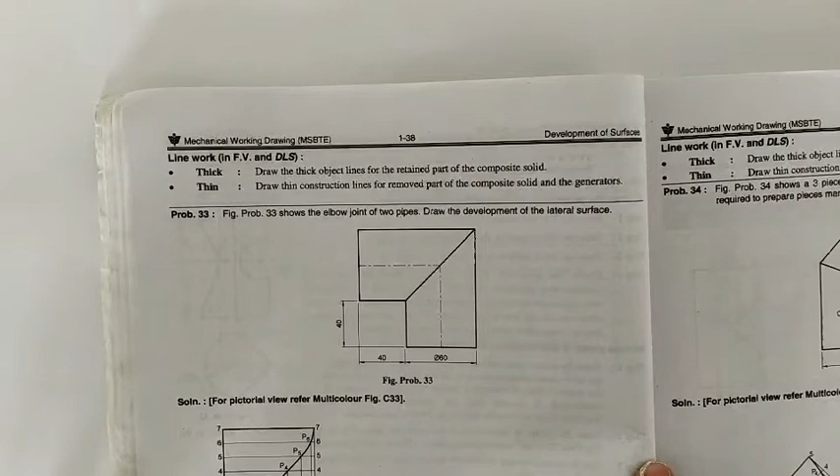We want to develop the lateral surface of an elbow joint as shown in the figure. As shown in the figure, 60 mm is the diameter and 40 is the corner of this elbow. Now first we want to draw the given figure.

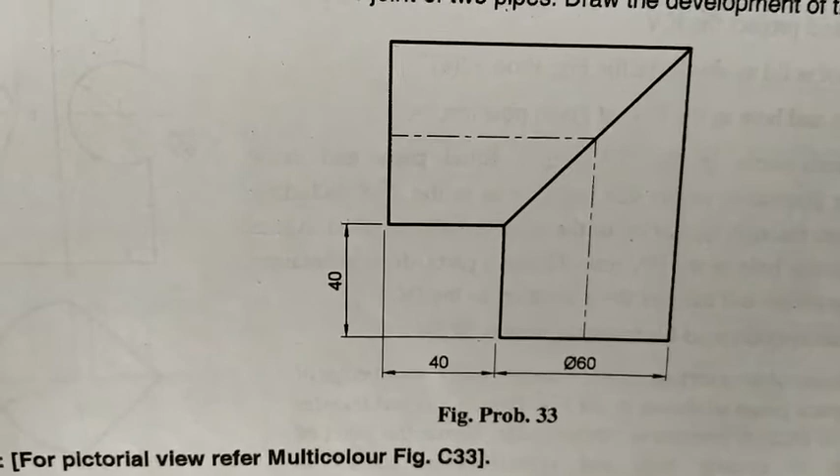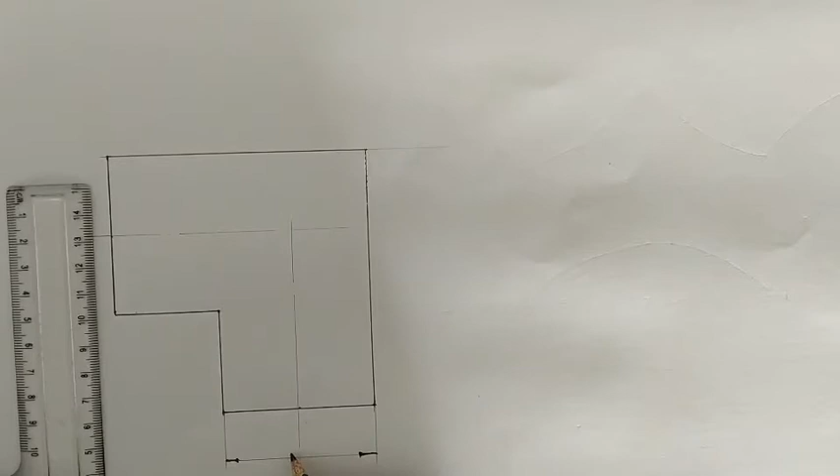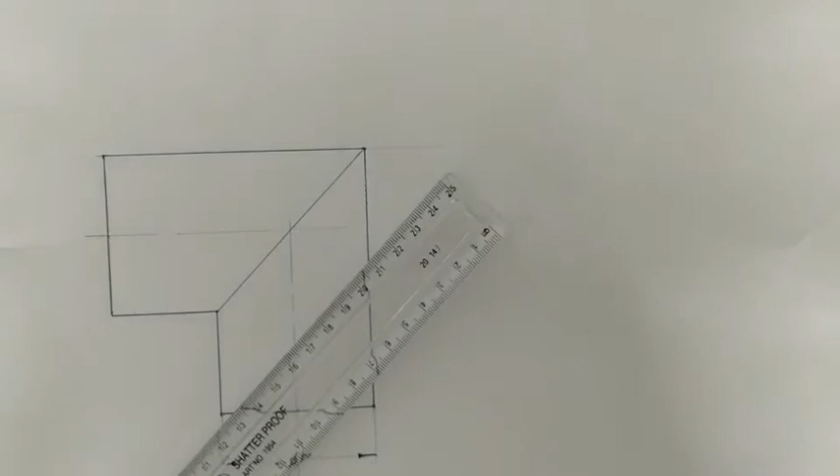This is the given diagram. This is 60 mm. That is, it equals the given 60. Now we want to join this curve. Join this corner and draw the half circle. Is it on the bottom side or on this side?

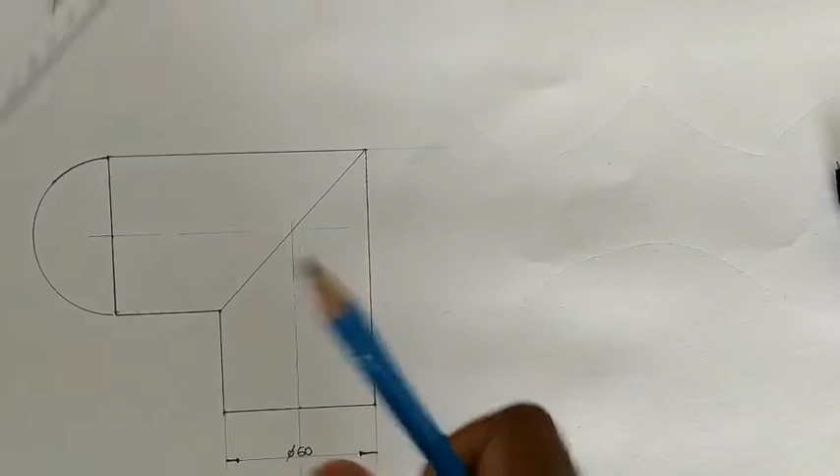Divide this circle in equal parts.

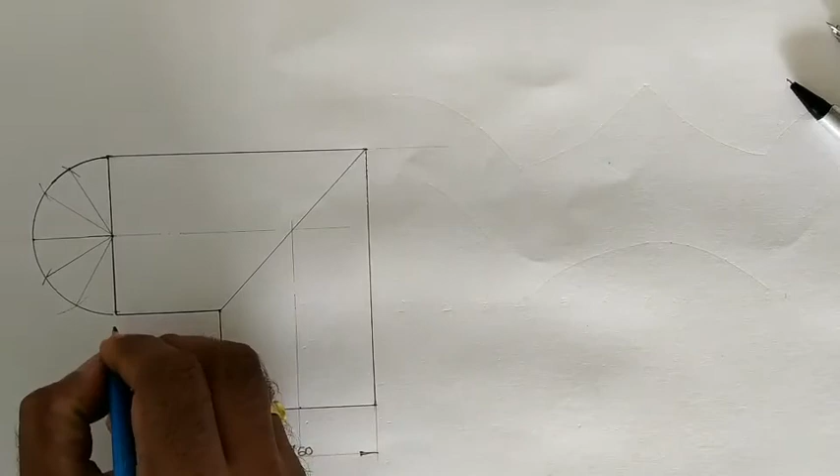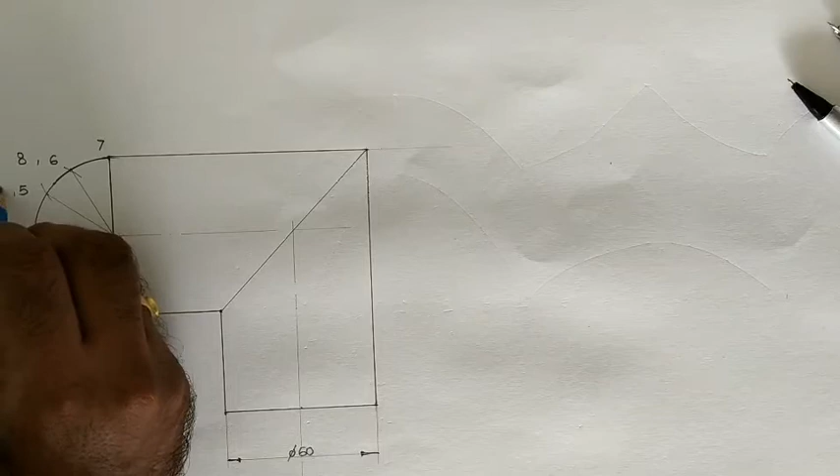Now number these points: 1, 2, 3, 4, 5, 6 and 7. Again considering the whole circle: 8, 9, 10, 11 and this is 12.

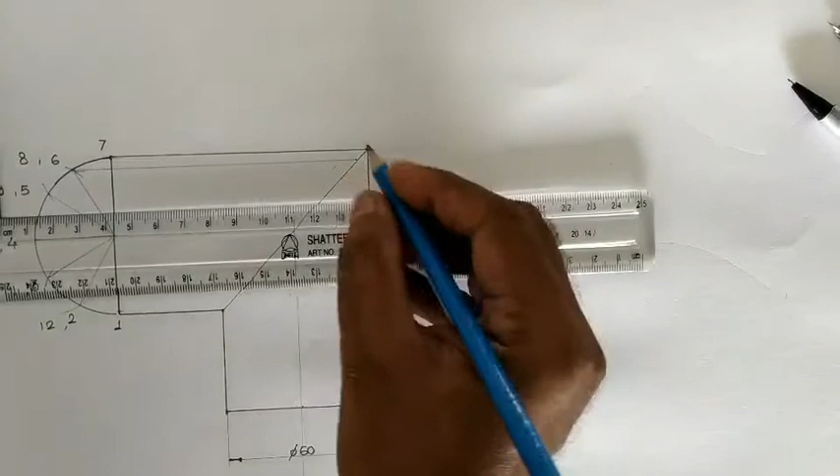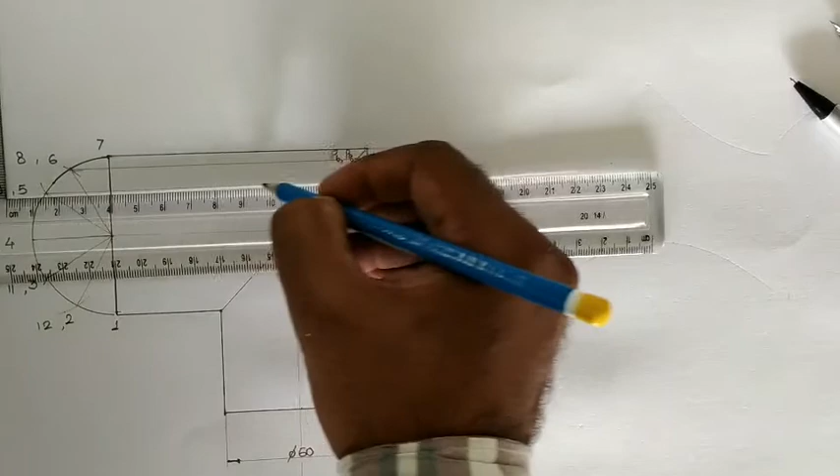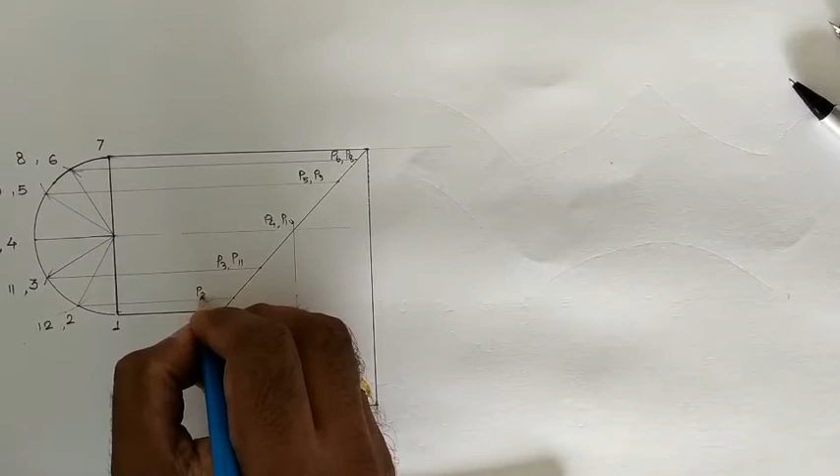Now project these points onto the inclined line. Now this point represents P6 and P8. Same way, this is P5 and P9. This is P4 and P10. This point represents P3 and P11. This is P2 and P12. This is P1. This is P7.

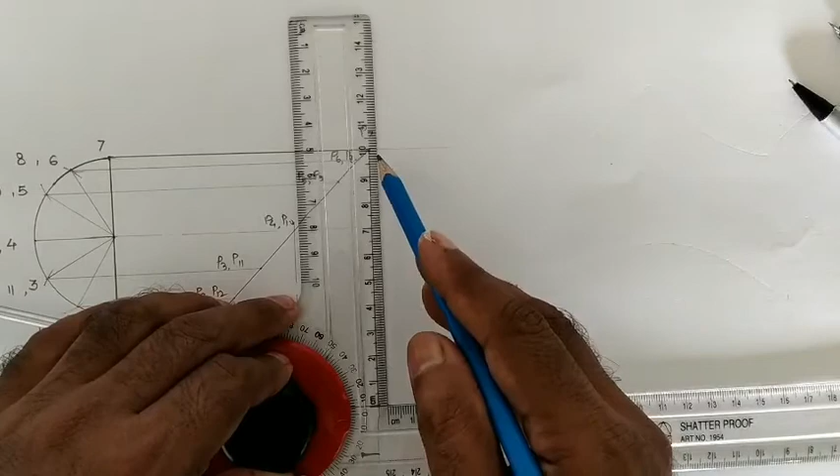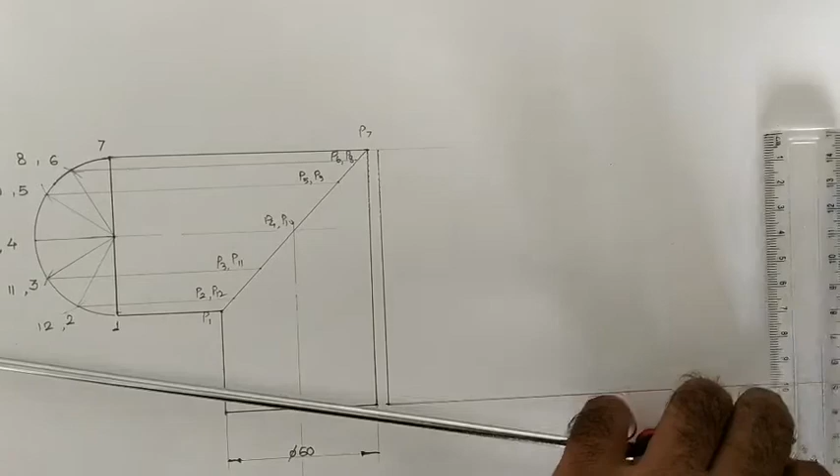Now develop this cylinder. The pi d distance, where 60 is the diameter, is 188 up to this point. Divide this line into 12 equal parts by the method of acute angle.

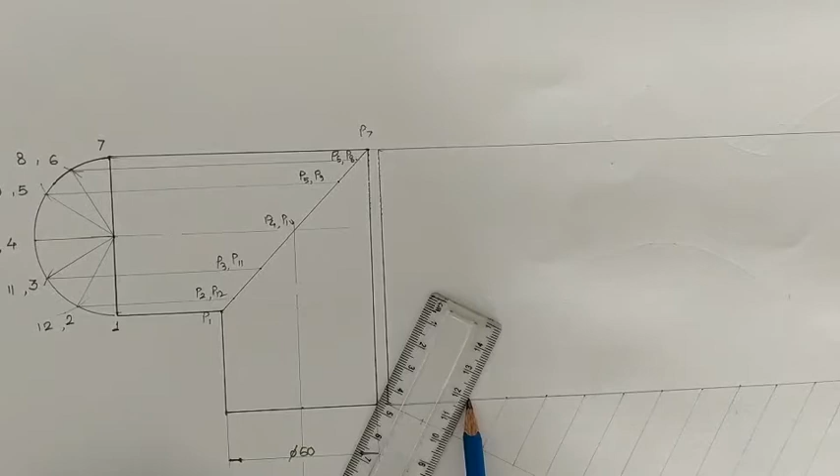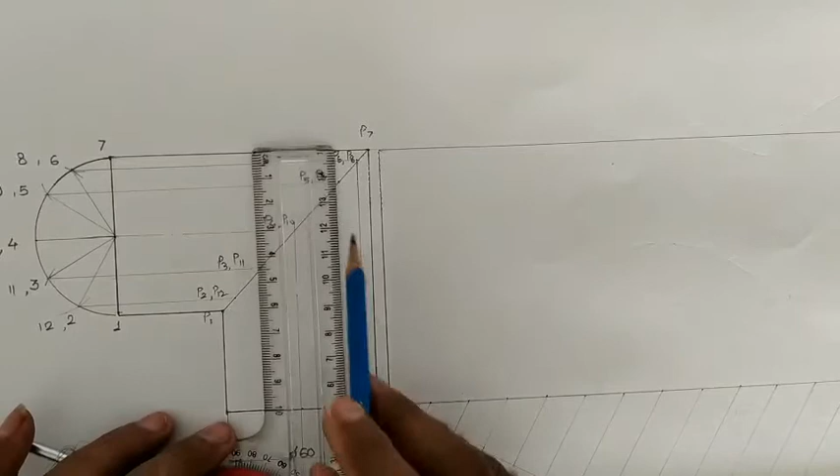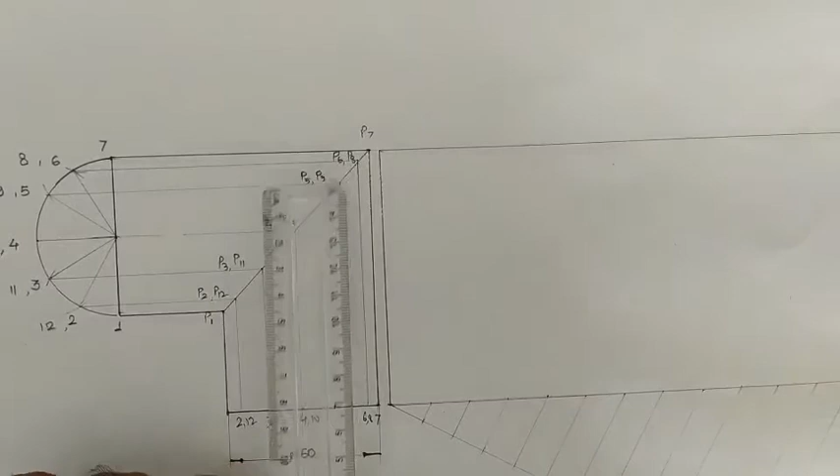Now project those lines by giving the numbers. Now this is point 7. This represents 6 and 8. 5, 9. This is 4, 10. This is 3, 11. And this one is 2, 12. Now starting with this 7, 8, 9, 10, 11, 12. Next 1, 2, 3, 4, 5, 6 up to 7.

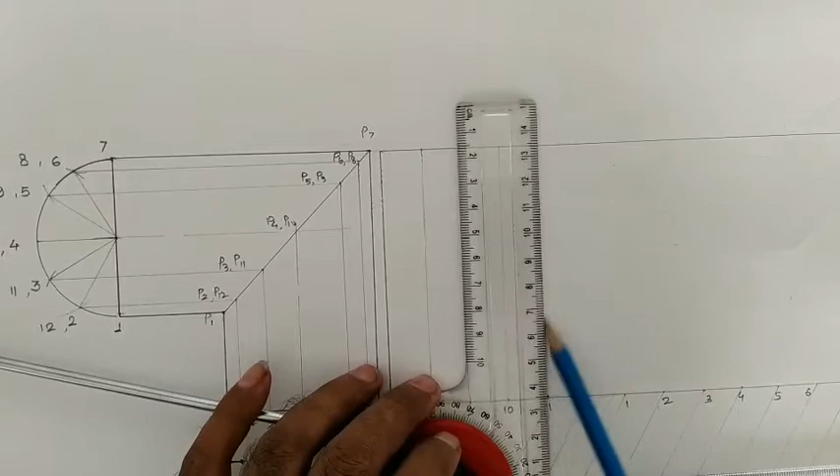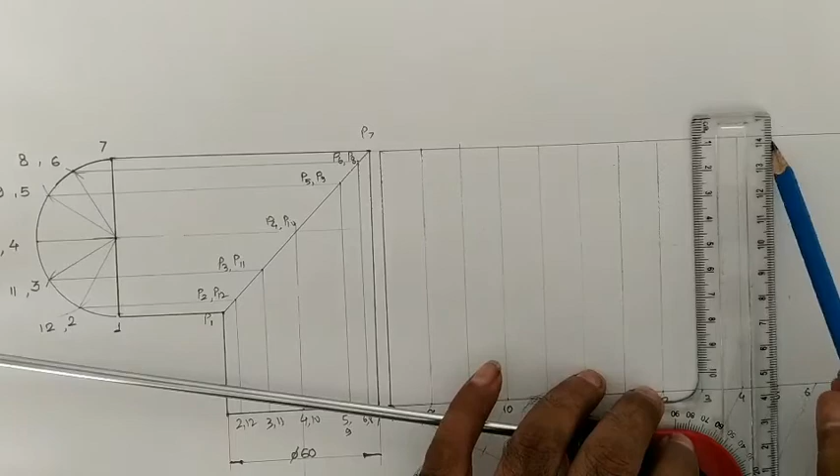After projecting this total line, the same procedure shall be done on this side also. Same procedure. Now this is from the top itself. This is 7. This is P6. And P8.

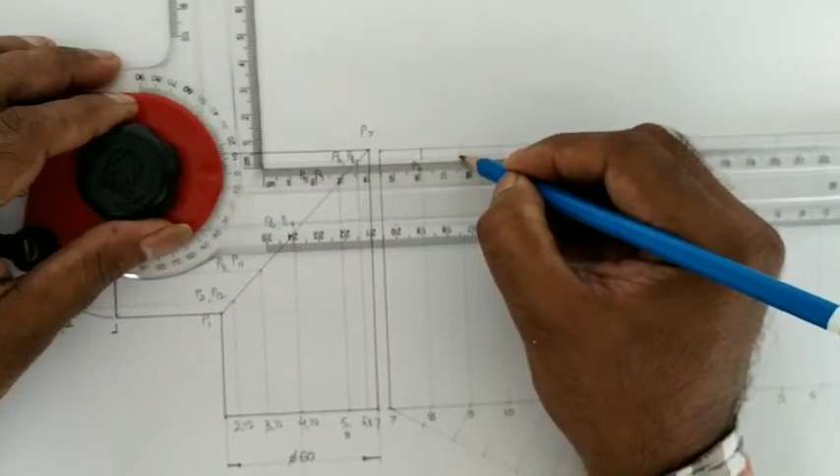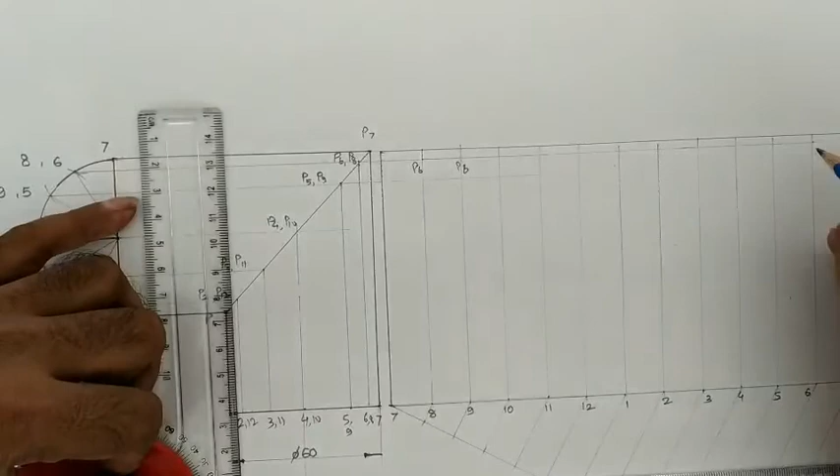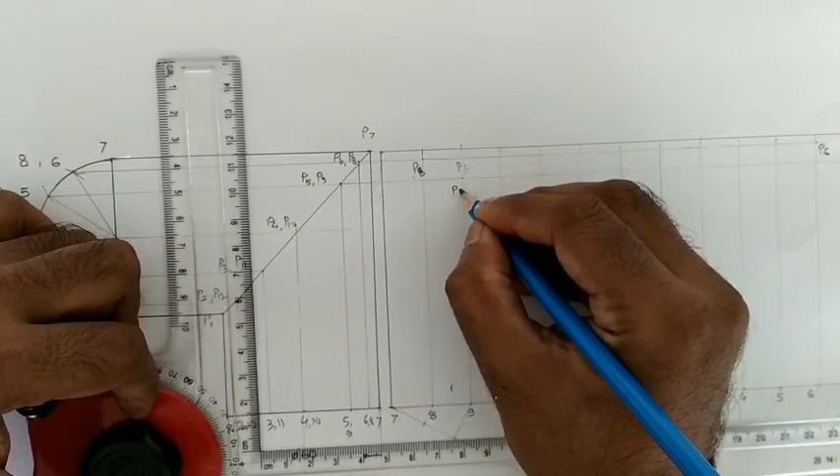Here is the 6 line, P6. This is 8, P8 and P6. Same way 5 and 9. This point is P9 and this point is P5. 4 and 10, P10, P4. P3 and P11, P11, P3.

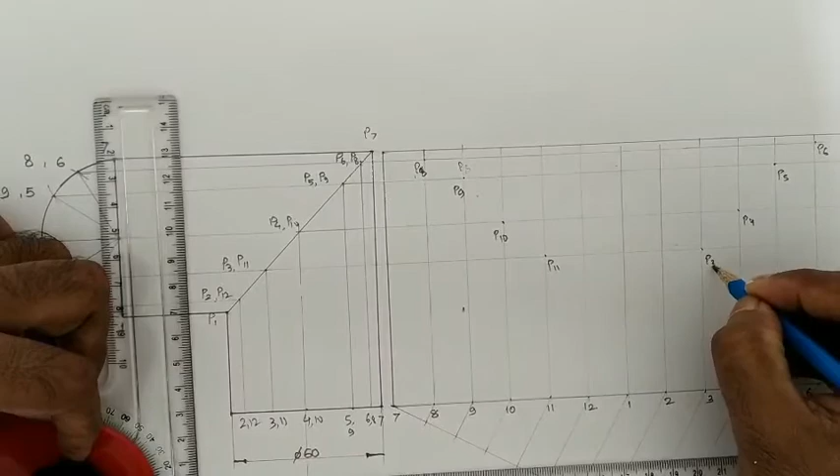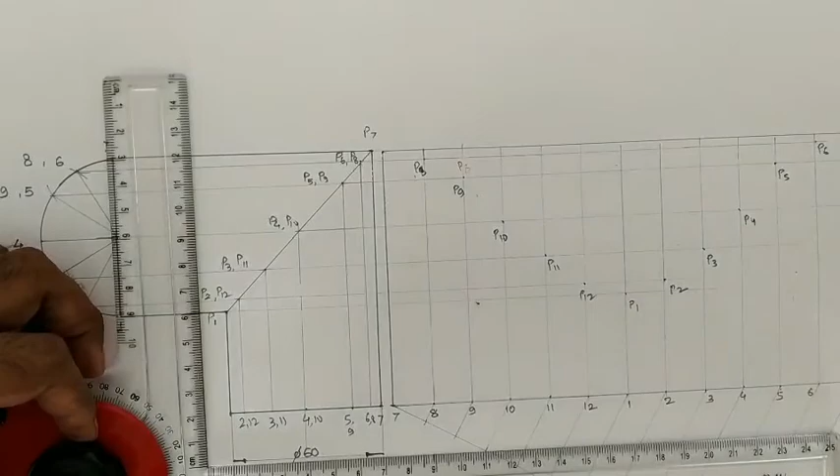P2 and P12, P2, P12, and this is a single point, P1. With the help of a French curve, you can join this curve.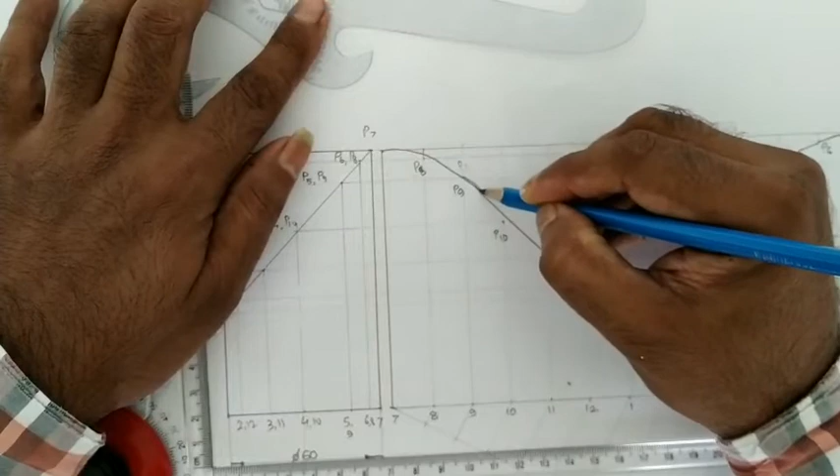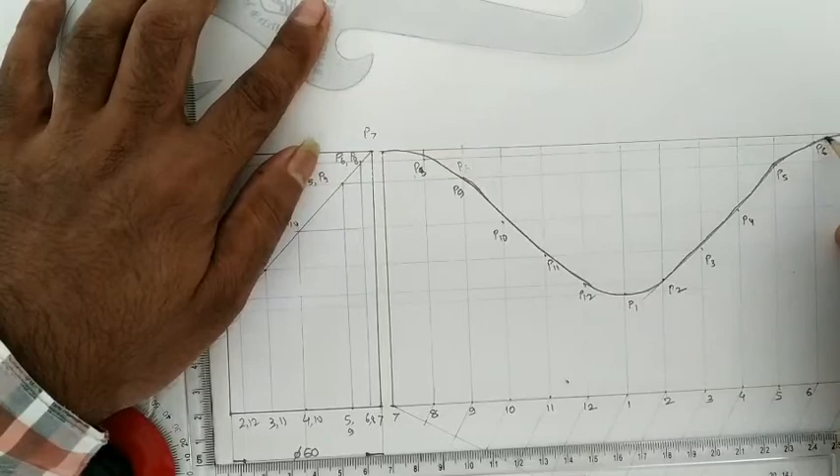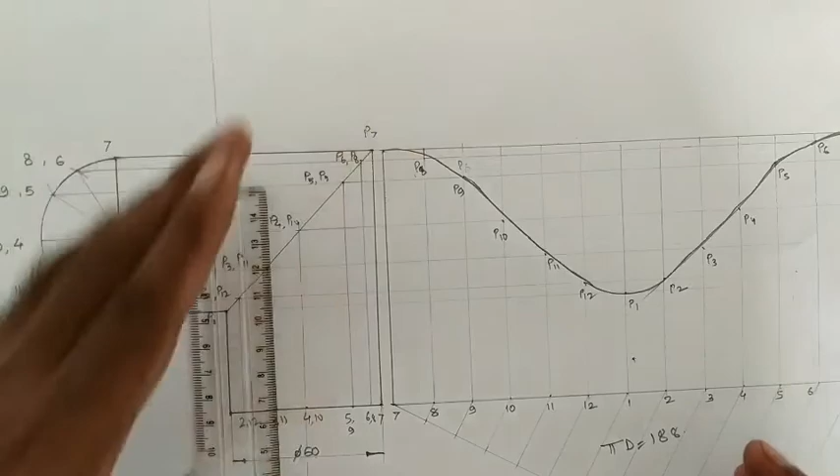The same procedure for this section also. The same distance is given, that is, the pi d distance is 188 mm. This distance is also represented on this side. Same way, divide into 12 equal parts, project these points and make the curve. This is all about the development of the elbow joint.